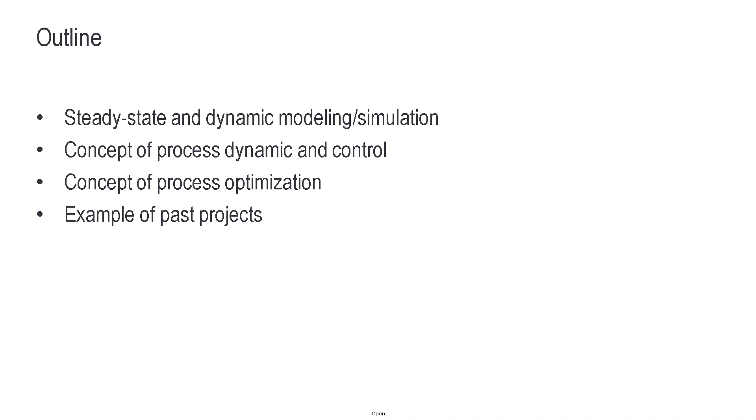Okay, now first and foremost, why do we do process simulation? I'm not really sure if you have my slides already, but we have 14 people here. Can I have 14 answers on why do we do process simulation? You can just type in the chat so that I can see I'm not talking alone. So why do we do process simulation?

Okay, I'm not going to judge, but come on, guys. This is still 3 p.m. on Friday, so the day is not ended yet. Susan, can you see the chat box? Can you see the chat box? Is that what I see? Like 3 replies? Can you see what the students have written? Yeah, I see 3, right? I see 3.

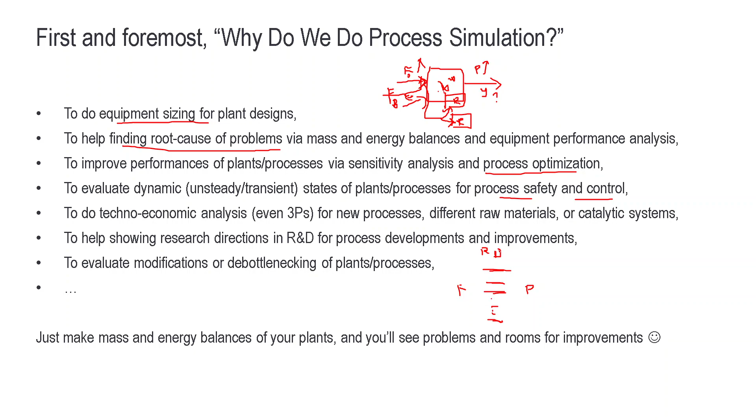Another one is if you work in R&D later on. We typically have chemist colleagues in the department, and they can invent all kinds of chemistry routes from feed to products. Our job is then to evaluate each of these routes, which of them are the most profitable or give us better economic profitability, so that during R&D we can then select some of these routes.

Either this one, maybe that one, maybe this one. So this phase is what we call R&D, or feasibility study, or conceptual study, so that in the next phase, like basic engineering for example, you can then say, okay, from this feed to that product, there are only 1 or 2 routes. So this is then what we call the techno-economic analysis study.

How we do that is basically the same as the mass and energy balance calculation in your plant design. It's just that we need to have more insights on the process and on the economics as well. So which part of the process consumes a lot of energy, which part of the process is very inefficient, which part of the process consumes a huge amount of cost. Those things need to be identified and then tackled in the next phase of the R&D.

It's also showing the next direction in the R&D for process development, right? So from this stage we know these two are the most profitable, so we get to this. But then these two routes, what disadvantages and advantages do they have? So if we see, okay, this is safer than this one, but this has a lot more cost compared to this process.

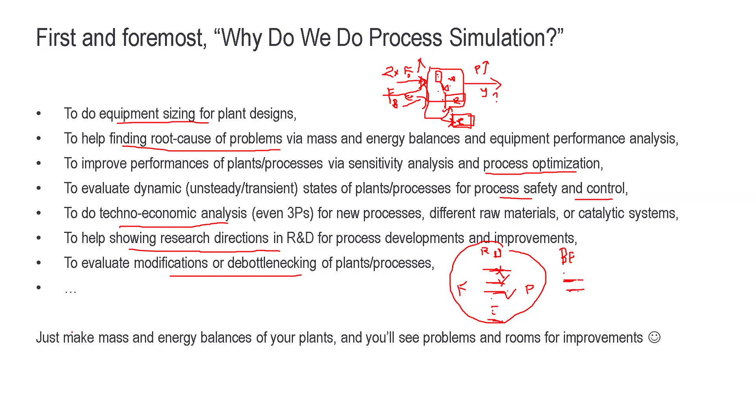So how do we see this system? If we see this as a steady state, what does steady state mean? It means there is no change whatsoever in the quantities that we are evaluating in time, right? In this case, the quantity is the volume of the liquid in the vessel. So the change of this volume over time equals 0.

So if this equals 0, you will have the same level at whatever time, and that means the flow rate coming in is going to be equal to the flow rate going out, right? Because if you have more flow rate here, you will get a higher level, but if you have lower flow rate here, you will get a lower level. As easy as that. If you have the same flow rate coming in and the same flow rate going out, then you will get the same level.

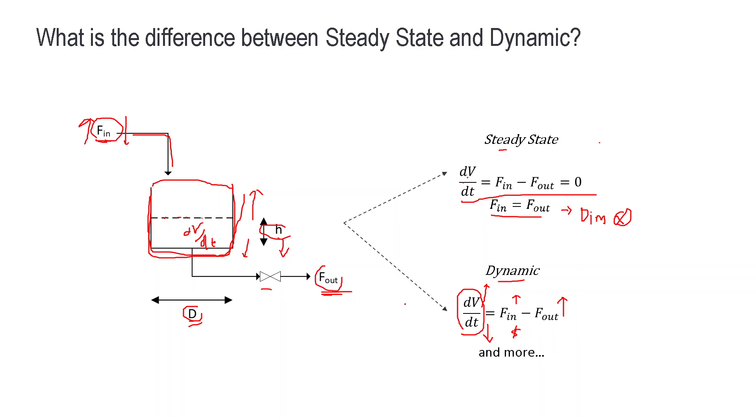In most, if not all cases, it's related to the size of the valve. A valve with a small CV will typically have a smaller size, and a valve with a higher CV will be a lot bigger in reality. So it is also a function of the valve characteristic and the pressure drop across it, because we can close and open the valve.

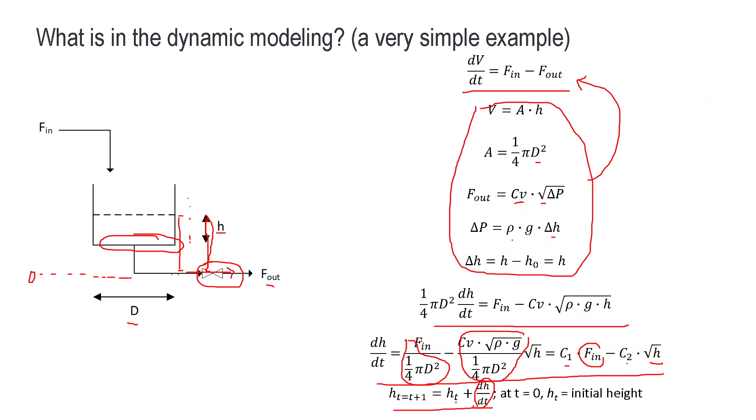So it's a very easy derivation for this very simple system. But then in reality, you will have a lot more complicated systems, as you can imagine. Right. So we saw that dV/dt equals 0, so there's no change in the volumetric quantity. But practically, we will see that as well: there's no change in pressure, no change in concentration, no change in temperature. So if there's no change in some of these, that means they are in steady state.

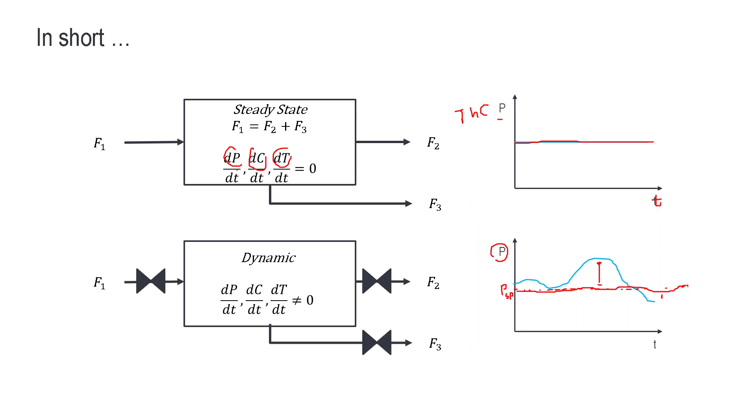Yeah. So things like this are very unacceptable, and things like that are very unacceptable. We want to have the system moving like this, right? So we want to make the system as steady as possible. Yeah, as steady as possible. So that's the use of this process control course that you are taking. Now, I think you know this already.

and then the controller will control the output basically. So like how much flow rate or how much temperature, and at the end of the day, just like opening a valve to increase the flow rate, or opening a valve to increase the fired heater duty, the gas, so that it can burn more, then you get more heat. So that's basically what this is. And if we increase the flow rate or increase the fire duty, what happens to the process, right? It will affect the process, and then you get your new Y,

and at some point there will be disturbance. There will be disturbance that we cannot measure. Say for example, some wind blows, right? Wind blows, and your pipe has no insulation, and the temperature drops, and this temperature here will be higher than this temperature here, for example. Because there's this wind blowing, or maybe some obstacle somewhere that makes this process flow rate lower than what you need it to be.

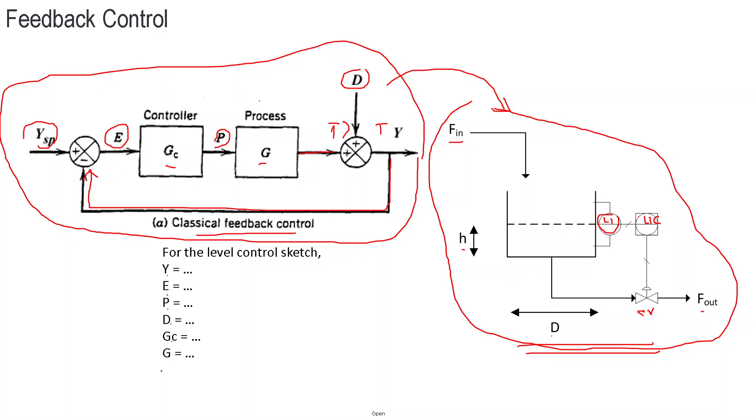Have you learned this process control? If not, then we can skip it. Hello. Have you learned this process control? So thumbs up or click yes if you have seen this before. Otherwise, say no, and then I can just explain to you, and then we can skip it. So do you mind going through it quickly? I believe we have learned this before, but I think it would be great if you can quickly run through it. Yeah, I will. But let me know your answer first, Adrian. Yeah, we have learned this before. Okay, no, I mean the answer for this. If we have learned this before, that means we have some sense on what this is, right? So can you type in your answer, I need another one or two answers, and then I will go through this.

You have learned this before, but then nothing sticks, right? That's typical. That is normal. Don't worry. So only Ryan is brave enough to put his answers on the screen. So anybody else? I need one more, and then I will explain. Any guess? If you don't know, then guess it. There's no harm in guessing. Go on. Man, we have only another half an hour left, right? I have so many slides. Well, anyway, if you're blank, it's Friday afternoon, yeah. I get that.

So why is this the process variable, right? So if I delete, how do I delete? Okay, I'll use a different color. So Y is the process variable that we want to monitor, yeah? So what do we want to monitor in this system? We want to monitor the height, right? We want to monitor the level of liquid in the system. So this Y is then the height, because that's what we want to monitor.

So Y equals height, and then the error is the height set point minus height. So you know that already. And then P is the controller output. So you get the error, which is the difference in height. For example, this is your height set point, but then this is your height. So that means you are lacking liquid in the vessel.

So you will need to close this valve, right? You need to close this valve in such a way that you will have more accumulation in the system. It will then calculate, okay, you will need to reduce the flow rate out. So how do we do that? By closing the valve. So the controller output is then the F out. So we need to reduce the flow rate out, and then how do we do that?

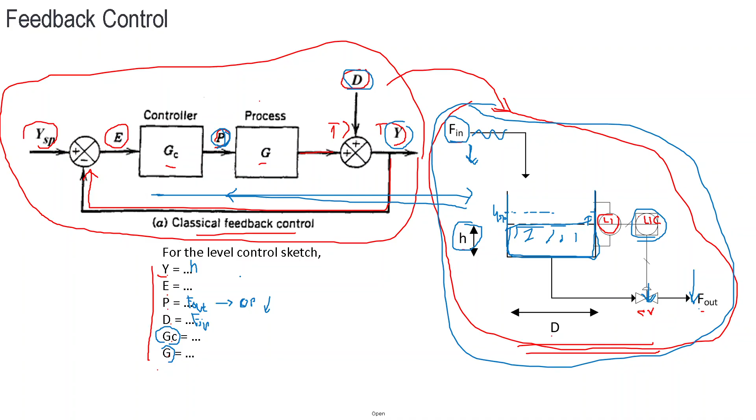So it's as easy as that. Everything makes sense. If it doesn't make sense, that means something is wrong, either with the explanation or the way we think about that. So that's what chemical engineering is. So it's not that complicated.

So now let's play around here. I took it from a textbook somewhere, which I don't remember, but I think this is like a process transmitter. So we don't know what this P is because everything is P. Process transmitter, and then I think PIC is indicator and controller, and then this is the valve. Because here, typically, in this case, we measure pressure, if P is the pressure.

So if the pressure goes up, what should the valve do? The valve should open, right? If the pressure drops, that means the valve should close as well to contain the gas not to escape, so that it can then pressurize the vessel. So that's basically how we read this. And then the same goes with this guy as well. I think it's more or less the same.

But then let's look at the coolant here. So we have a process stream, and then we have a coolant here. That means if we have a heat exchanger like this, and it wants to be cooled down, this temperature will be higher than that temperature, right? And then this P, I assume it should be like a temperature. So this is the process transmitter, like a temperature.

So if the temperature here increases, what should we do to the valve here? We will have to cool it more, right? So you'll need to have more coolant through the exchanger. So we will have to open this more, and then if the temperature here drops, that means you'll have to close this valve. So we have a smaller flow rate.

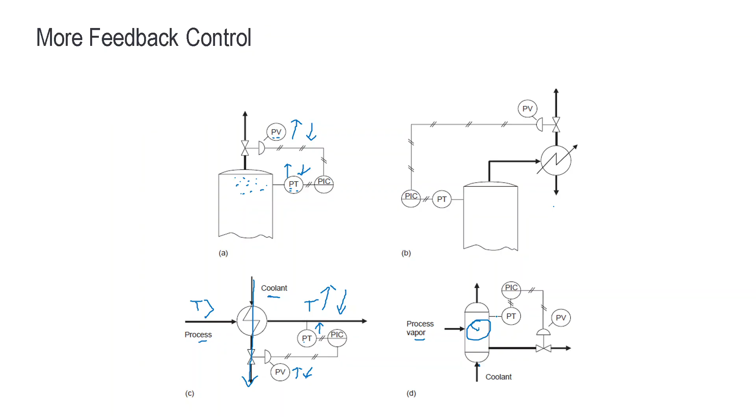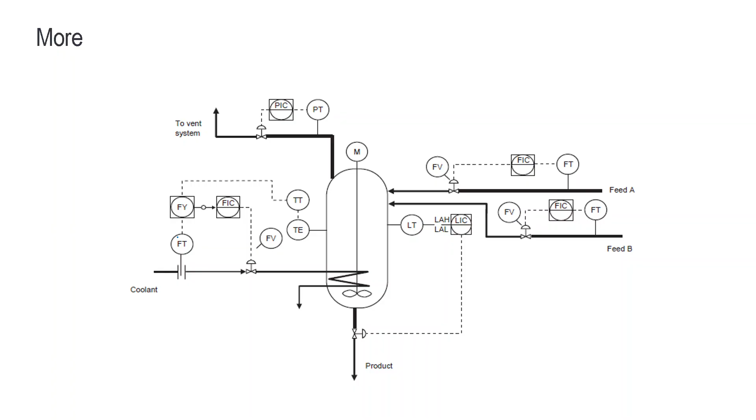What else do we have here? So I guess this is more like a process vapor and then coolant. It's not really clear how the process is working around here, so we will skip this. So this one, I'll just skip. You have a look and see if you can understand this. If not, then you can discuss it and ask your lecturer or ask me later on if you're stuck. But give it a try and see if you can understand the diagram.

This one as well I will skip, because I have a demo that I want to show you. So we have this DME process. You will need to add the control loops yourself. So we have methanol coming in, and it goes to this holding tank or holding vessel, and then from this vessel we pump it through a series of heat exchangers so that we can have 250 degrees C entering the reactor.

So it's a fixed bed reactor, and it is exothermic. So this temperature here is around 360 degrees C typically. And then we have a bypass, bypassing the heat exchanger, right? And then they combine here. One goes via the heat exchanger, the other one goes here, and then they are commingled here,

and then it will be cooled down to 100 degrees C, for example, and then we drop the pressure via this valve to be somewhere higher than 10 bar gauge, because 10 bar gauge is the condensing pressure at the top over here. And this column is what we call the DME column, because this is the reaction. So we have two methanols. It will be dehydrated. That means we take the water out, and then we are left with DME, dimethyl ether. DME is used as a propellant and also as an octane booster.

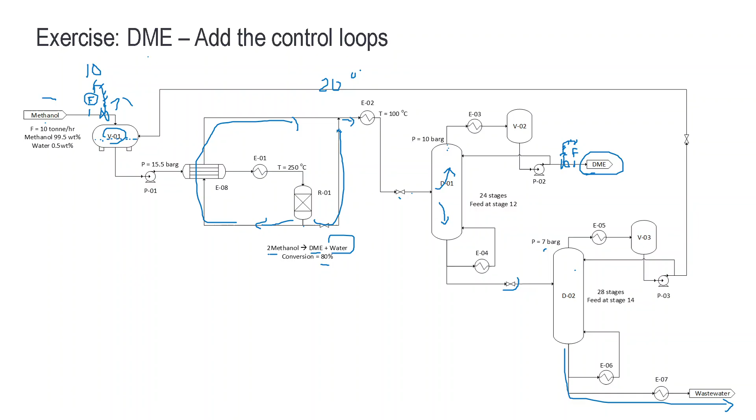So that means we need to add another 80% to make it 100%, right? So this is what we call methanol makeup. Because the name is makeup, we just need to make sure we have sufficient level here, because we have methanol recycle, right? And then we just need to make sure that we have a sufficient level here, so that this pump can pump whatever amounts we need it to be.

So this is like a level control, and this level control can be connected to the valve directly, or cascaded to the flow rate, and then from flow rate to the valve. So this valve is just to make sure that we have enough level of methanol in this vessel. So that's the use of this valve. So very good. And then the second option is this valve here, right?

So this valve here, say this exchanger, you don't see any vapor stream coming out, right? So this is like a fully condensed system. So that means all of this will be filled. I mean I can just put it here. Right. So this will be filled with liquid, all the way here will be liquid, and then some part of this will be with liquid. So it is like a submerged bundle in the exchanger because it is fully condensed.

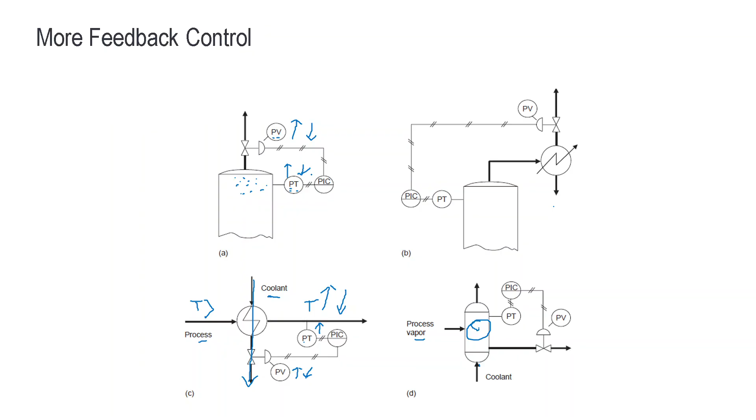But then the question is how to know, because this is a set point as well. Like in this case, see this set point. So how do we know what the set point is, right? What is the optimum set point, so that we can make a profitable process out of this? So number one, first and foremost, we need to do the mass and energy balance calculations. We have the model, and then we have the cost associated with it, right?

So we know the cost of methanol, we know the cost of DME, we know the cost of wastewater, and we know the cost of all of these heat exchangers, heaters, coolers, fired heaters. We know the cost of electricity and so on. So once we know the cost of raw materials, the cost of products, and the cost of all utilities involved, then we can formulate what we call process optimization, and once we solve it, which I'm going to show you, it will tell you how much the reflux is, how much this temperature is, and so on. So that's how the process is optimized.

And then once it gives you the optimum number, it will become the set point, and then the control loops will try to match that. So if, for example, the optimal number is 10, this valve will open and close to make sure that we get to 10. The same goes with this temperature, and so on, right? So that's how process optimization is connected to the process dynamics. I'll give you a demo, don't worry.

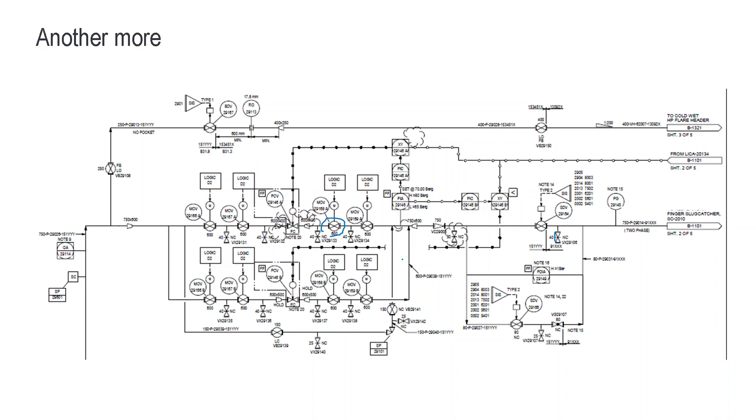So now just a quick one. In practice, we have multiple layers of optimization. What you have seen so far is sensors, right? This temperature element is a sensor. There's a thermocouple here, so that's a temperature sensor. And then we have actuators. Actuators are what move the valve. You already know how the valve looks, right? This moves in milliseconds, so it will do the calculation in milliseconds, right? The flow controller, level control, and so on. So it moves in milliseconds.

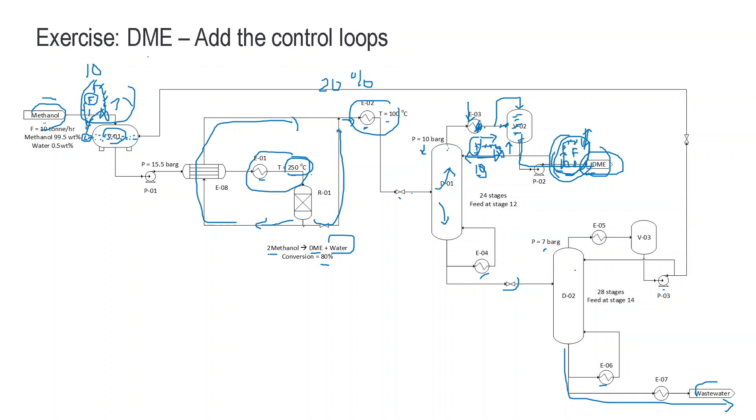So that's the job of this orchestrator, the advanced process control, to make sure that it gets that 10 number and the reflux. The 10 number is coming from this RTO guy, based on the economics. And then above that is what we call scheduling. So what it means by scheduling is that now we have methanol grade A coming from company A, and then we can only do so much, right? Or they can only ship that much.

And then the following month or so, we have another shipment coming from, I don't know, country B or plant B, also giving methanol, but maybe a slightly different grade of methanol, or for a refinery, for example, different types of crude. But we stick to our DME plant for now. And then you need to schedule when this tank is going to be used, and when this tank is going to be used. So that is the part of scheduling. So we will do this scheduling daily.

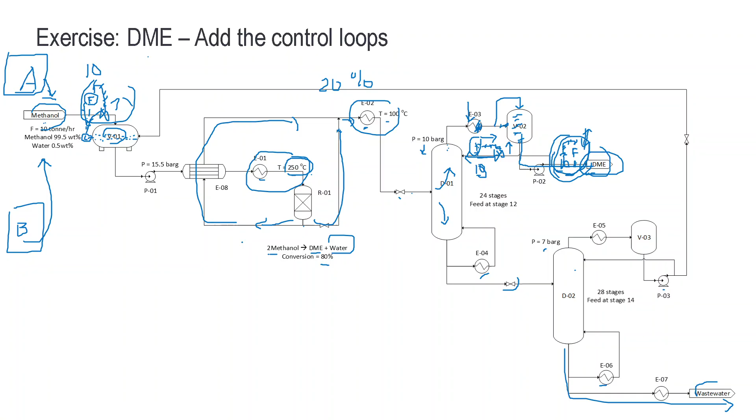And then on top of that, we have what we call corporate planning. So if you have one plant over here, plant one, and you have another plant two in Malaysia, and another plant three in, I don't know, India, and another plant four in, you tell me, the Netherlands, for example. And then we have another source C, and this goes there, this can also go here, this goes there, and this goes here, and then we will calculate the whole.

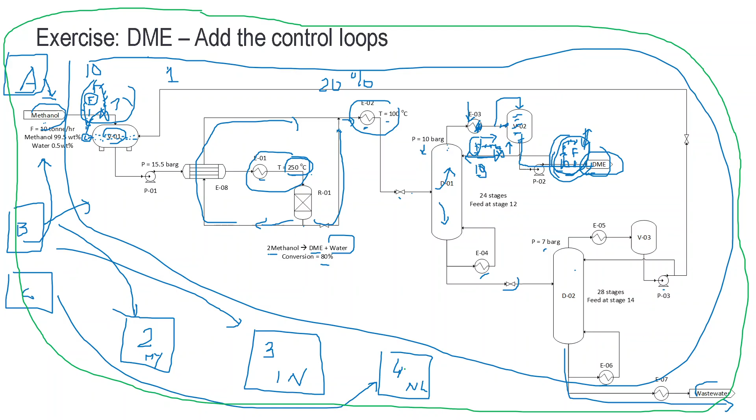I'll change the color. The whole profitability of your corporation. Not only the profitability of one DME plant, but the profitability of all 4 DME plants, for example. That is what we call corporate planning. Is that clear? If not clear, then you need to ask me.

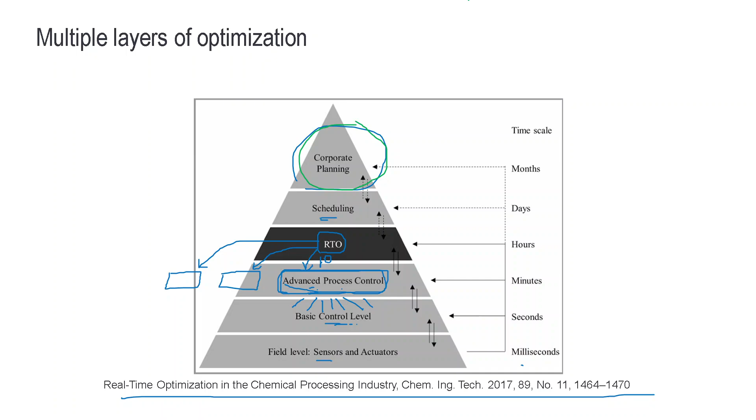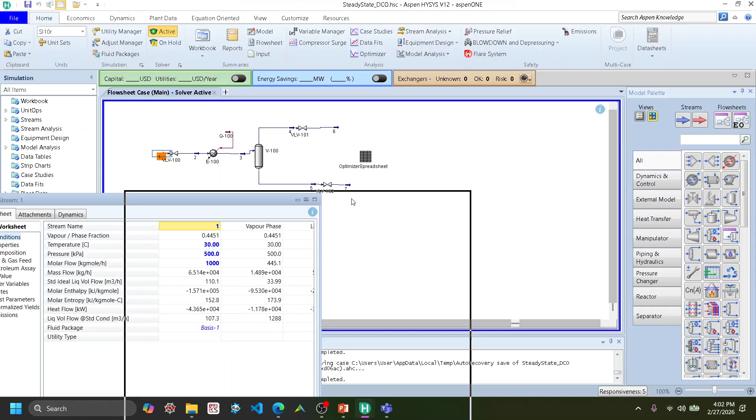So now we go to the demo. I will do the demo. So suppose now we have a plant, a very simple one. I can open it to you. So we have this is the temperature in degree C, 500, whatever, and then this is the composition. So we have the heavies and then the lights and then some heavies, and then we are going to cool it down, right? Sorry, I'm going to heat it up.

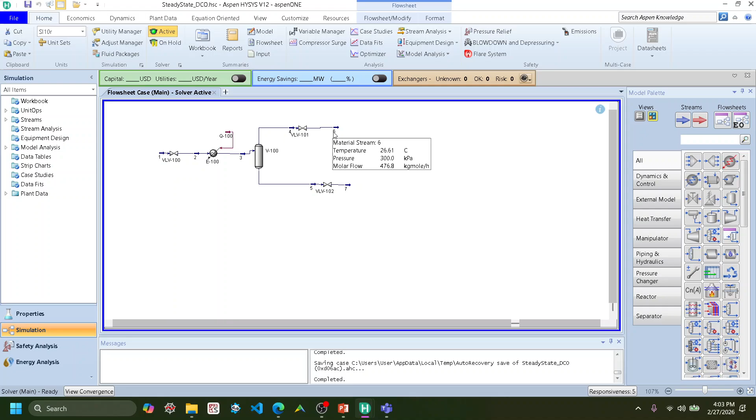So this is the temperature. It's 26 degrees, and the outlet is 27 degrees. So it's 26 to 27, like a 1 degree increase. So we want to heat it up basically. So this is our duty, our utility, and it costs us some money. And then we flash it, and we'll get some lights here in stream number 6. So we have incoming of 1000, and then 476.8 coming as the vapor, and the remaining 523 as the liquid.

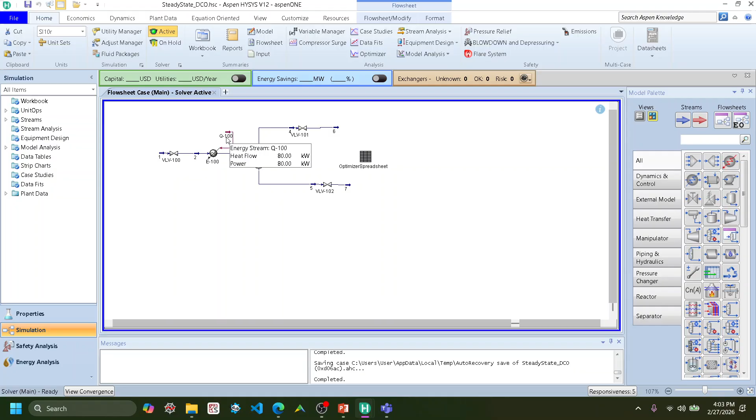So the question is that stream number 1, number 6, and number 7 all have prices, right? And this duty also has a price. So we just need to make sure that when we run this, what is the optimum duty such that we have the most profit from this very simple process. So how do we do that? We go to the optimizer.

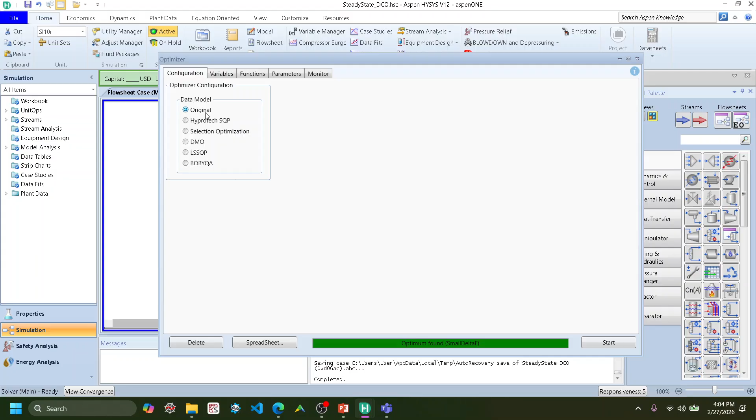We go to the optimizer, we select a simple one, original, and then we go to the spreadsheet, and it will give us this spreadsheet, and you open it and define yourself the process optimization. So first we formulate the objective function. The objective function is the profit. So profit equals the feed that we have to pay, right? So we just simply copy paste. So if you go here, sorry, not here, the stream.

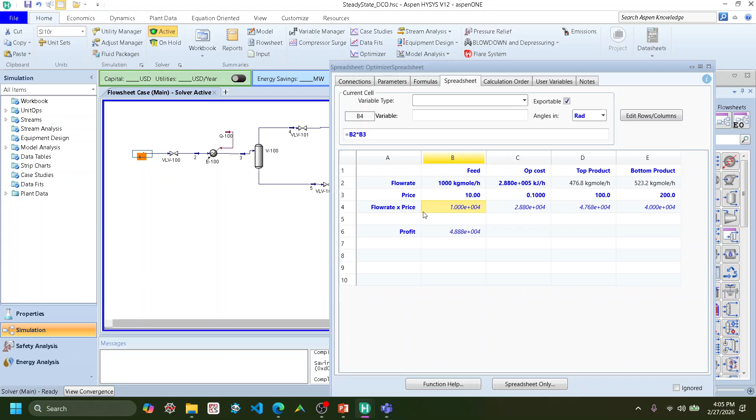So you go here, you just copy or drag and drop to this cell, and you'll get this number over there. And then I just put a dummy price, and then multiply this into that, you get the flow rate times price for the feed. The same goes with the operating cost.

So this guy now currently is around 288,000 kilojoule per hour, which is I think equivalent to 80 kilowatt. And then this is the price for the operating cost, and then we have the top product here, and then the bottom product there. This is the flow rate, that's the flow rate, and then each have their own cost. And then we can see here in this dummy process, I put the bottom product as more expensive than the top product, right?

So the profit is, of course, the top product plus the bottom product minus the feed minus the operating cost. That's this guy. Oh, sorry, voila.

Zufan, are you showing the HYSYS interface? Yeah, I think I've been showing the HYSYS. Oh, but I just see your slide, simple case. I can't see the HYSYS interface. Okay, yeah, 1 second. Okay. I think I shared the window, the entire screen. Screen number 1. Oh, screen number 1. Sorry. Oh, so all this while you don't. Okay. Because I don't see any comments in the chat, so I was like, okay. Can you see my HYSYS? Yes, now can see it. Okay. Thanks, Zufan.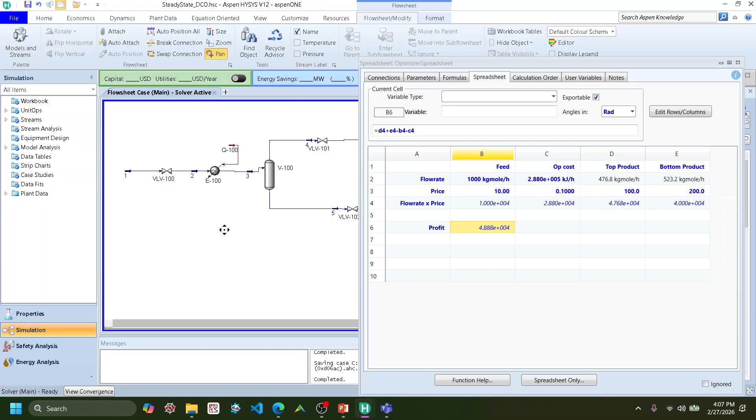And then this is our independent variable, or the handle, or the thing that we can manipulate to make sure that we have some amount to the top and some amount to the bottom streams. And then we just need to make sure, because all of these have some price, right? So our feed materials have a price, products have a price, and then the utilities also have their price.

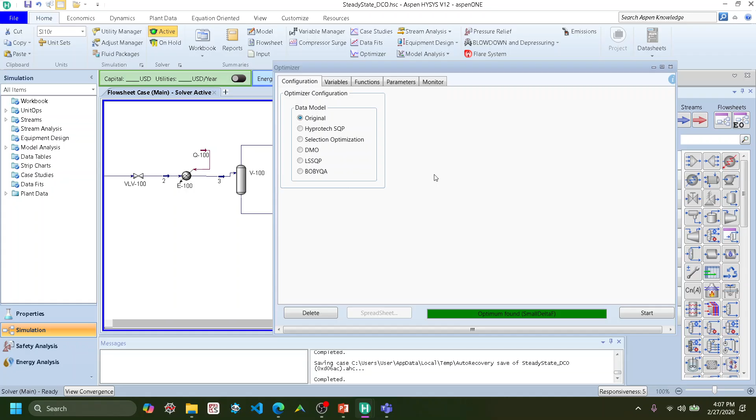So how do we do this? We can then click on the optimizer, like I did, and then, because this is a very simple one, use the original one and then go to the spreadsheet, and then we get to the spreadsheet that I just showed you. Let's do it here. Right, so profit is then what we sell, the top product, plus bottom product minus feed minus operating cost. And then as you can see here, that is the current result.

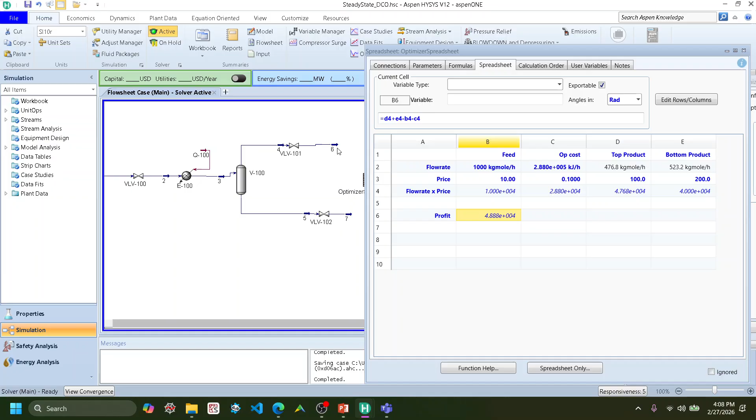As you can see here, the bottom product is more expensive than the top product, right? Okay. The question to the class: so we have this heater. We want to increase or decrease this in such a way that we can maximize the profitability. So, you know, this one is more expensive than that one. So what should we expect this duty to do so that we can maximize this profit?

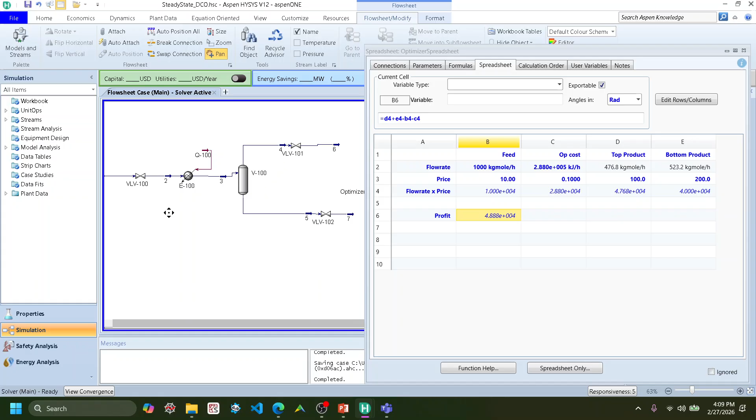So what do we expect this to do? That's the question. I'll give you a few seconds to think, to let me know what this guy should do. Do we need to increase the duty or reduce the duty so that we can maximize the profit? So what do you guys think? Come on. So this is a heater, right? This is 26, this is 27. So this guy's giving heat. So do we want to increase the heat or reduce the heat so that we can maximize the profit?

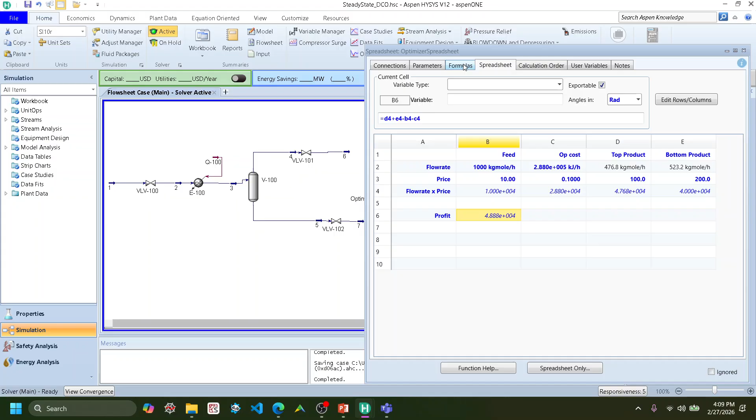In that case, I think you should decrease it so that less of it will escape to the gas phase. Yeah, very good. That's what we would expect. So now we have the profitability formulated over here, and you can see the formulas here, and so on and so forth. And then you can go back to the optimizer. So currently we go to variables, and we define the variable.

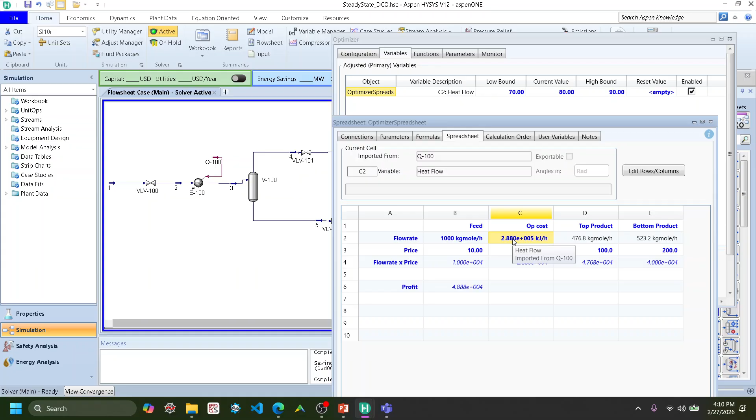So the variable is, if I show you, the variable is basically this duty, which is this number, C2, right? So if I change this, I'll just change it here because I know the unit. I don't know what this unit is. So if I say 81, this number will change, and then you can see the profit change as well, right?

If this is too quick, for example, it's 75. So see, this duty will change, the operating cost will change, and then the profit will change. So you can then do what we call a sensitivity analysis, play around with this duty, because this is a very simple one, or you can do this optimizer stuff to make it a bit cool. Well, nonetheless.

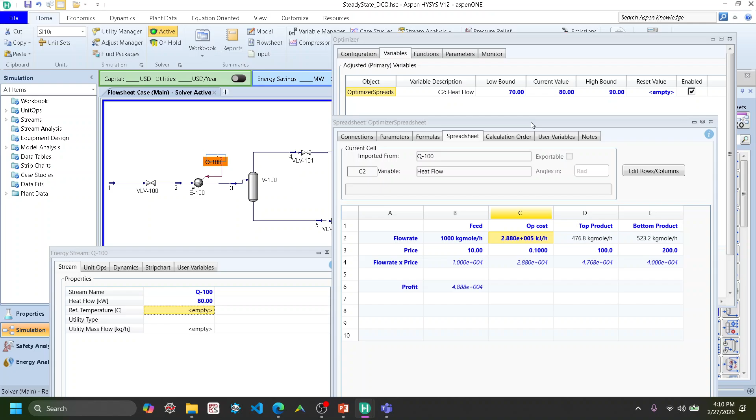So if I close this, these are our variables, and then we put the bound, because we don't want to end up with no vapor or no liquid. So the lower bound is 70, and 90 is the high bound. The current situation is at 80, so you can move from 70 to 90. And then the function is our objective function, which in this case is B6, this guy. And we want to maximize it.

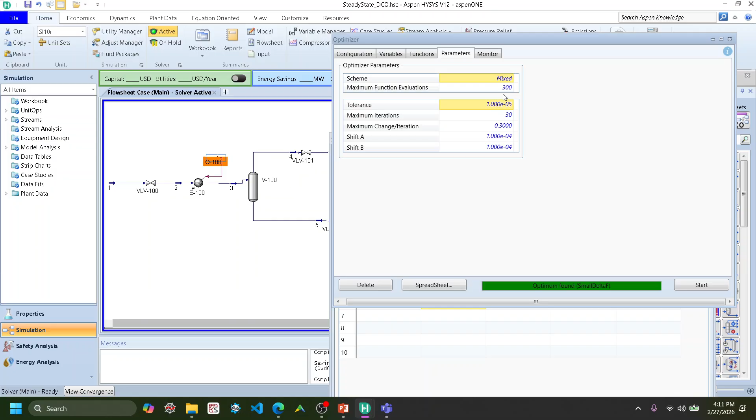We don't have any constraints at this moment, because all constraints are equality constraints in this case, and our inequality constraints are the handles that we have. So there's nothing here. These are the solver parameters, and now we can calculate this. So we have this start button over here. Click start, and then it should think, and then optimum found, right?

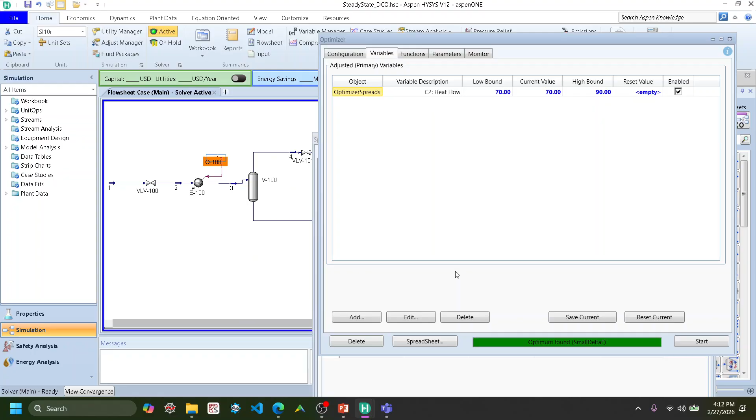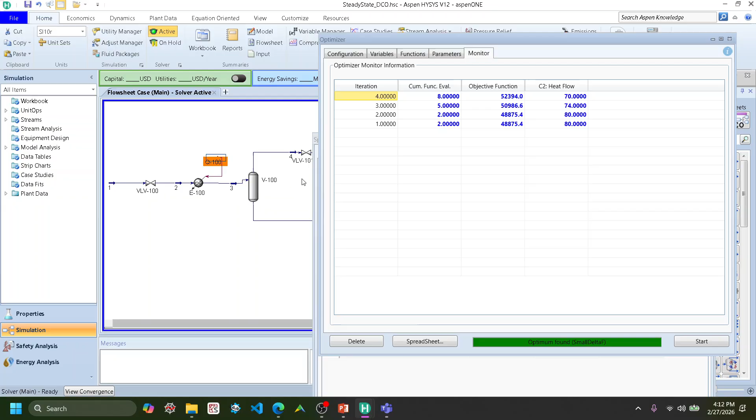I don't know if you saw, it was 80 and then it goes to 70, like Ryan suggested. We want to reduce this, because we know the more expensive product is the bottom product. Then we can monitor the iteration steps. The first iteration was 80, the second iteration is also 80, the third iteration is 74, and you can see the objective function increased from 48 to 50, and then it ends up at 70, because that is our lower bound, and we get another 2000 more. So in 4 iterations we get to the so-called optimum duty to make this a profitable process.

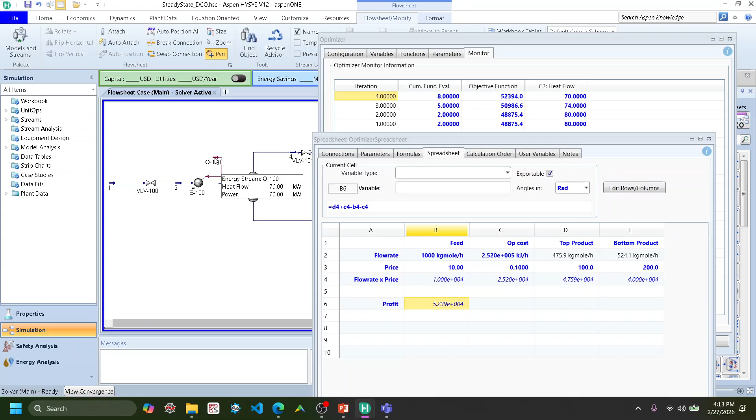So now we have done the optimization. How do we then translate this to the process itself? What we need to do is, now we have the new target, which is this guy. It was 80. To maximize the process, the new target is to set the duty from 80 to 70 to maximize the profit based on this process optimization. So this is our process model. We send this 70 number to the plant, and my plant is also another HYSYS.

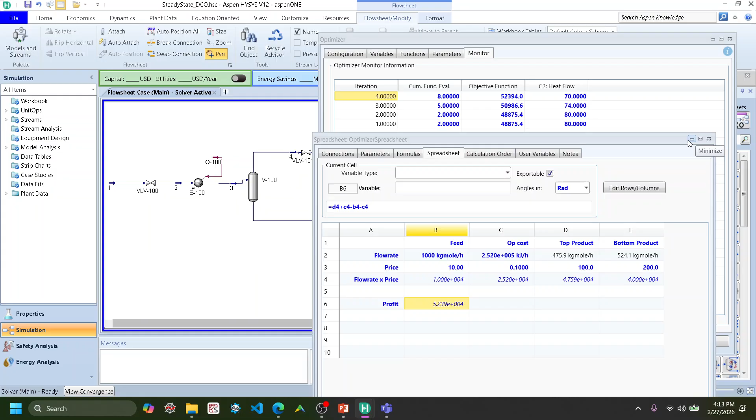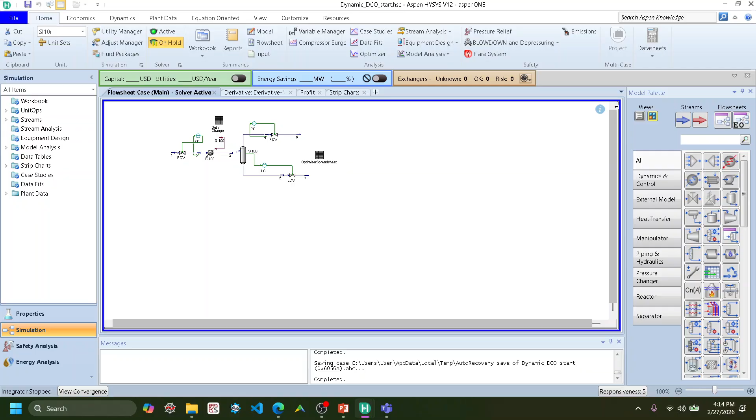So if I minimize this, minimize that, my plant is hopefully this one. Yeah, this is my plant. Why is it not going up and down? View. Anyway, I cannot zoom in.

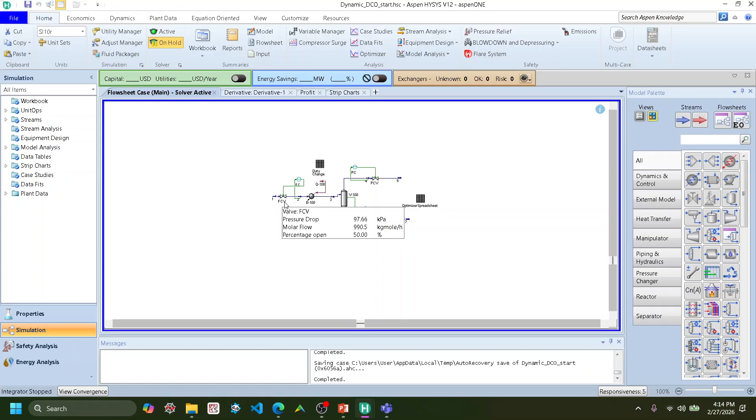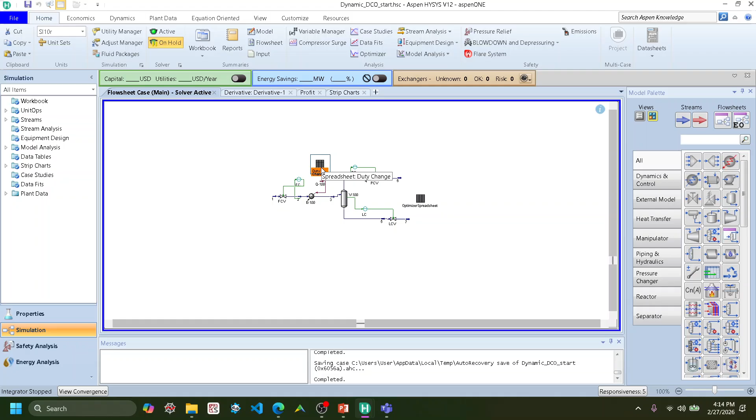So we have a flow control here, I hope you can see this, and then we have the pressure control here, level control there, and then we have this duty. And then I made a kind of translator, because it was 80 and now we want to make it 70. So this is the guy that handles the transformation. I just made a very simple one.

Not to disturb. So currently we are at time 0, and we will change the duty at 600 seconds. The new duty is 70, which is the optimum duty we will impose, and currently it is 80. I want to reduce this duty gradually: at 600 it goes to 79, at 700 to 78, and so on, until at 1500 it goes to 70. And by that time we should get more money.

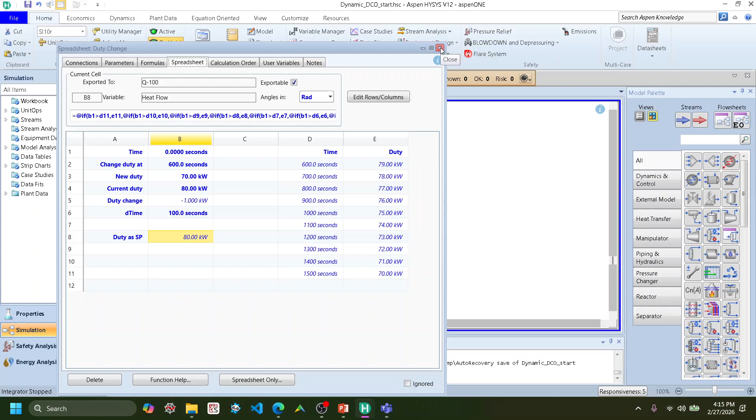So what do I plot? This guy. This is our optimizer spreadsheet B6, which is the profit. So the profit is B6, and then we have the duty of this guy. This is the variable. This is very small because I have only one screen.

Next time we'll have it offline, yeah, to make it more interactive.

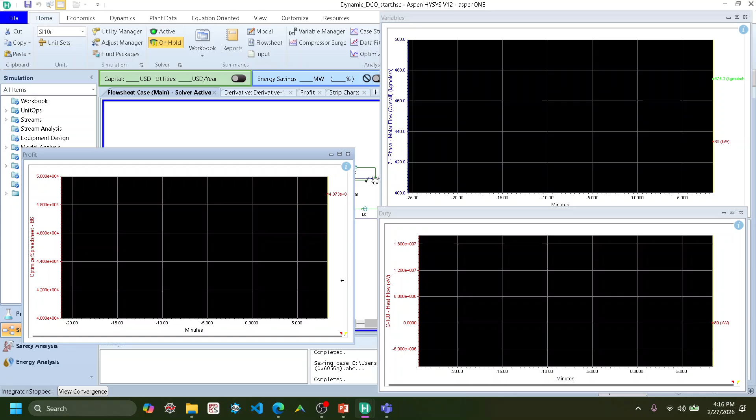Let me put it here. Let me put it there. This is the duty. Okay, this is my profits. Now let's run this integrator. Yeah, I'm just going to run this anyway. So it's now running. Real time factor is like 5 times faster than the real time, so that we can see the movement. Otherwise, it will be too quick, because I don't put any accumulations whatsoever in the system.

So we can see the profitability is around 4.8, right? The maximum profit was 5.2, from our optimizer back in the day here. 5.2, yeah. So now it's 4.8, and then this is 474 for the top product, and I don't see the bottom product. Can I auto scale all axes? Yeah. So I have the 474 as the top product, 5 something as the bottom product,

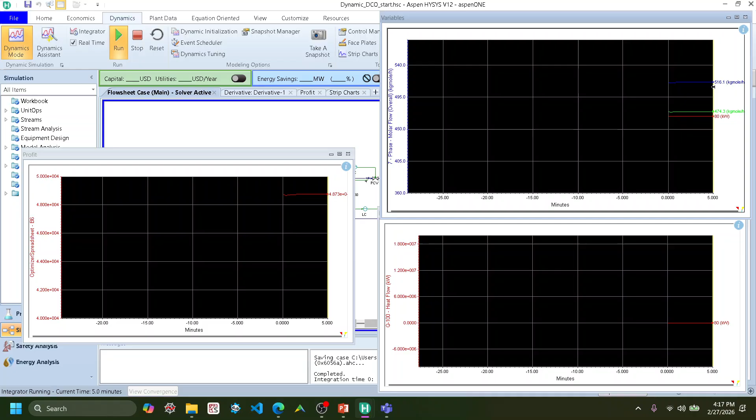and then 80 is the current duty. So at 600, as I already coded in the advanced process control, at 600, which is 10 minutes, and this 5 minutes. Sorry, 600 is 10 minutes, right? 10 minutes, 5 minutes. It will drop to 79, and then 78, 77, 76, and so on and so forth until the optimum duty, or the lowest duty

in this case, 70. And then you will see accordingly the bottom flow rate will increase, the top flow rate will decrease, and the profitability will increase as we know it. And then this heat flow, it will decrease as well. So I have a redundant graph. I'll close this. This is redundant. Oh, sorry.

See, at 10 minutes it goes from 80 to 79, and then you will have a step in the profitability, and it's very minor. I think the flow rate will change, but it's very minor. And then the next 100 seconds gets to the second change. So we do a step change like this. Theoretically this doesn't matter, but I just want to make sure that in practice we do things slowly but surely, not to disturb the dynamics of the plant too much, right?

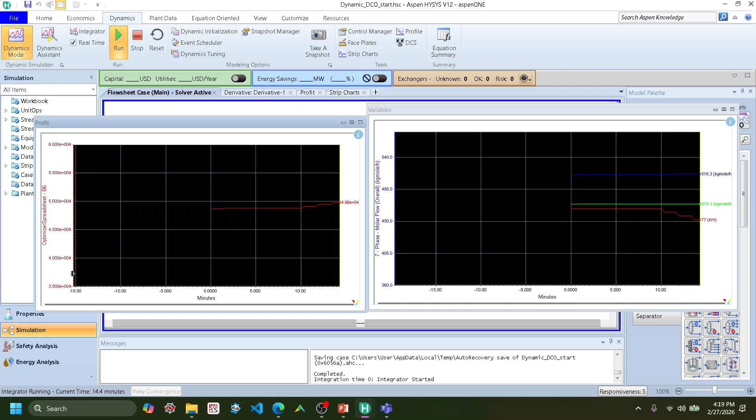So our plant is making money. See, from 4.8 to 4.9 now. Now it's 5.0. So you get money by reducing the duty, and this new set point comes from the process optimization that you have done before. So I think I've demonstrated how process optimization relates to process control, how the process is being controlled now, and how process control is built on top of the dynamic understanding of the system, or dynamic modeling, so to say.